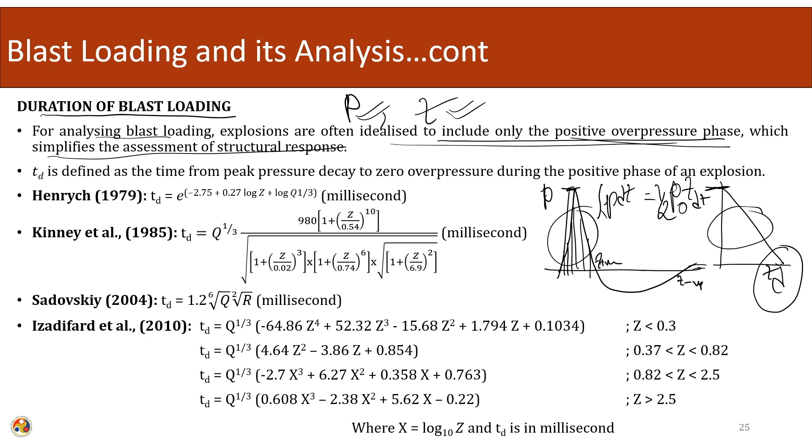For analyzing blast load, explosions are often idealized to include only the positive overpressure, and this simplifies the assessment of the structural response. Here Td is defined as the time from peak pressure decay to zero overpressure during the positive phase of an explosion. This is how we try to calculate the Td. There are different equations, as we have seen earlier, similar to the pressure equations — contemporary equations for calculating Td also.

Henrych proposed this particular equation in '79, and again we can see this equation also has a proximity factor. So this equation is again a function with respect to the proximity factor and other constants multiplied to it.

Kinney, we saw earlier, has a pressure equation, and similarly he has a Td equation, a time equation also. Again this equation is a function of the proximity factor — this is the non-dimensional value of the proximity factor, and multiplied by a value, it converts back into the time Td.

Sadovskiy also proposed a similar equation, and Izadifard also proposed different equations. Here he broke it into four parts depending upon the range of the proximity values — he proposed four equations. So the point to take away is that there are different equations, and all these equations have their own limitations.

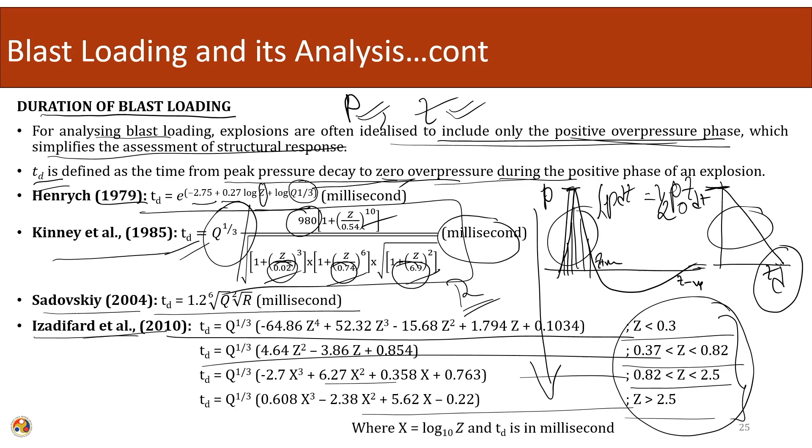Either they are grouped depending upon the proximity values, or they are grouped depending upon the type of explosive used, atmospheric conditions and other factors. Also they are unit dependent. So all the factors being used are made depending upon the units, and all these equations are somehow related with the proximity factor. These are good approximations that can be used to estimate the time of loading, but they should be used carefully, taking into account their limitations as well as the particular unit they are given in. So this way we can use different equations to categorize our blast loading, the pressure and the time part also. Now, the effect of the blast loading.

During an explosion, a pressure bulb forms and a spherical pressure wave expands outwards. This is how the blast is going to expand outwards. So when these waves strike the ground, they reflect and reinforce the incident wave. If there is a reflection, a reinforcing effect will form, and that will add to the incident wave, and then travel along the surface with greater pressure, velocity and duration.

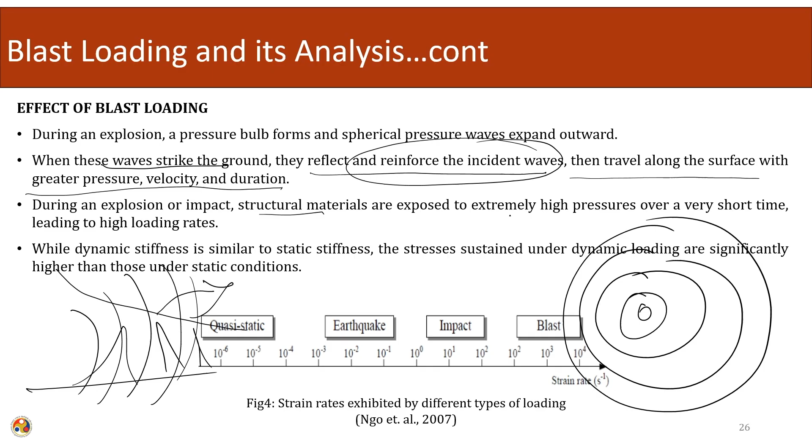So there will be an increase in the effect of the blast if there is a reflection from the ground. During an explosion or impact, structural materials are exposed to extremely high pressure over a very short time. During an impact, this is the nature of the loading, and during a blast, this is the nature of the loading, where the magnitude of the pressure or force is very high, and the time duration is very small. So the structure is exposed to extremely high pressures in both events, occurring over a very short period of time, resulting in a high loading rate.

While dynamic stiffness is similar to static stiffness, the stresses sustained under dynamic loading are significantly higher than those under static conditions. This phenomena we have seen as a strain rate effect.

As the rate of loading increases, the amount of stress that the system can survive becomes more, so its resistance capacity becomes more. What might happen is that the value of strain or ductility might become less, but stress wise it will increase. Strain wise, or ductility wise, it might decrease. So this is the enhancement in strength due to the strain rate effect.

As we move from quasi static to normal loadings like earthquake, then to the impact region, and again to a high strain region like blast, the stiffness of the system and the strength of the system increases significantly.

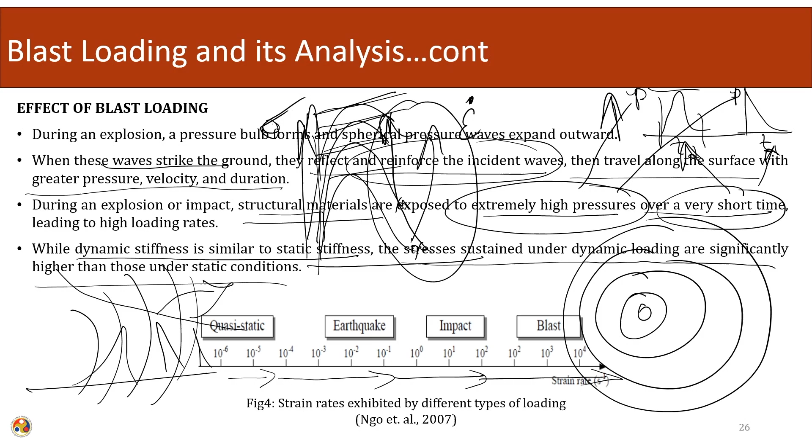So in blast resistant design of structures, the increased material strength under higher loading rate is accounted for by using the dynamic increase factor. If we look into the stress capacity in the dynamic sense and stress capacity in the static sense, there will be an increase in this value, and this is known as the dynamic increase factor. So for a high strain rate event like a blast event, we use the enhancement in this capacity.

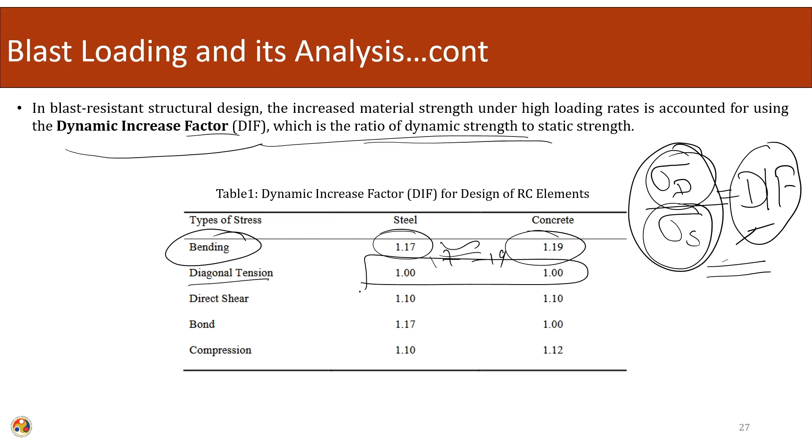DIF is nothing but the ratio of the dynamic strength with respect to the static strength. So in the bending phenomena, if we look into steel and concrete, it is roughly increasing from 17 to 19%. For diagonal tension, we do not account for any increase, though in reality it might increase, but since this phenomena is very complex, we do not take any increase in the factors.

Shear, again a phenomena less understood, so we only take 10% increase. Bond, again for concrete, it is not very well known, so we do not take any advantage due to the dynamic increase factor, and we keep this ratio the same. Steel a bit more is understood, so we take around 17% increase. Compression, we take 10 to 12% increase. So basically if you look into this phenomena, what is interesting is that in reality there will be a dynamic increase factor in the blast event, due to the high increase in strain rate, but there is a parity between what we know and what we do not know. So what we know, we try to take full advantage of.

So here bending is normally well known, so we take 17 to 19% increase in both steel and concrete. The phenomena which are not very well understood, like diagonal tension, direct shear, we do not try to take that advantage, like the bond slip in the concrete. This is again a phenomena which is not properly understood, so we do not try to take the advantage due to the dynamic increase factor.

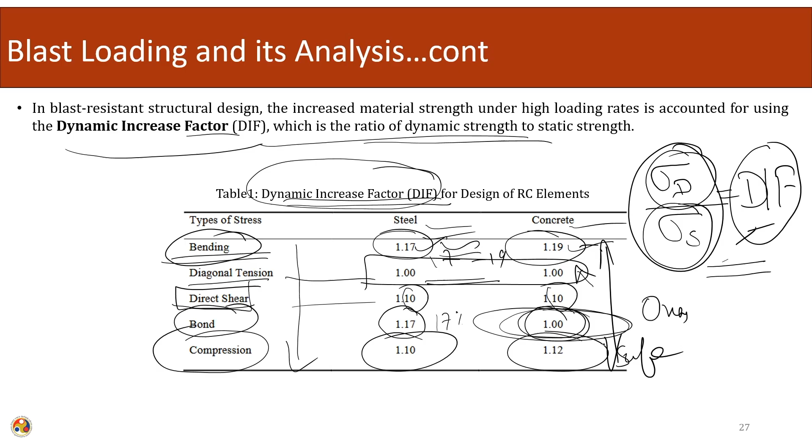So again this is a limitation between the overestimated design. We should have a safe design. Though in reality there might be an increase in the DIF value, but normally we ignore these values. So this will give us a design on a higher side only. Why higher side? Because these are all the capacity values. Though in reality they might be more, we are taking lesser values. So we are assuming a low capacity of the system, though the actual capacity might be higher. So what we are trying to do is increase our margin of safety out here.

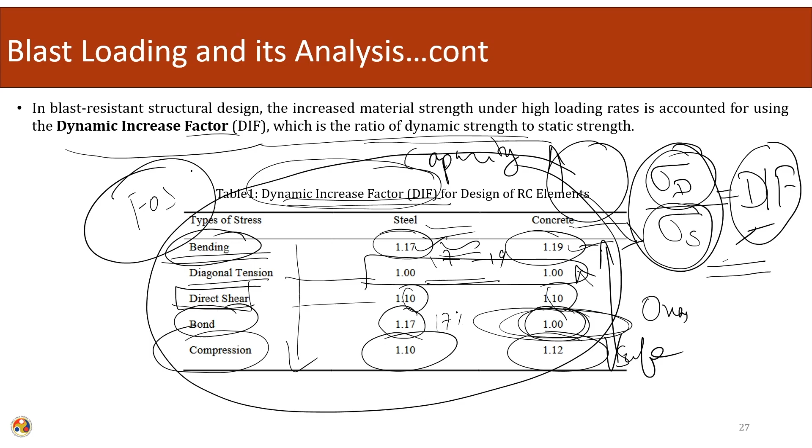Dynamic loading. Static loads are either time independent or change very slowly over time. They are applied gradually and remain on the structure for extended period, for example live loads and slowly moving loads. Dynamic loads are highly time dependent, they act over short duration or change rapidly in magnitude or direction, for example machine vibrations, earthquakes, impacts, blast.

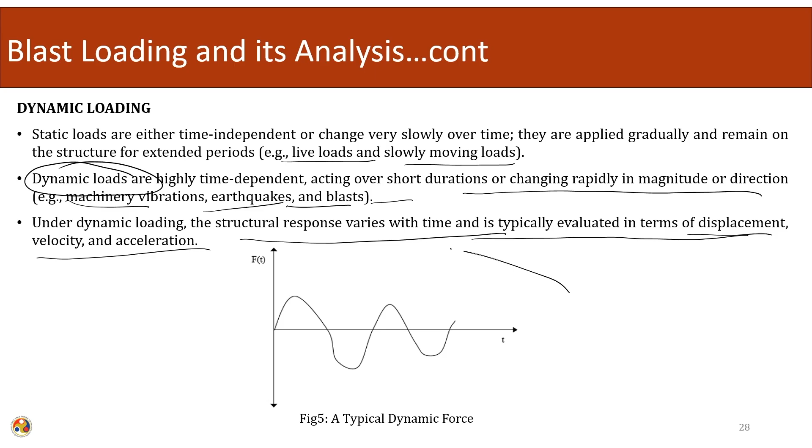So they are predominantly termed as a dynamic event. Under dynamic loading, the structural response varies with time and is typically evaluated in terms of displacement, velocities and acceleration. This is a typical representation of a dynamic force, so again different methods of analysis are being used.

Blast is a short duration load and is often referred to as an impulsive load. Under the theoretical assumptions, if negative pressure is neglected and only the positive phase is considered, the blast can be approximated as a triangular load. This is what we were discussing earlier also.

The literature shows that a structural response to an explosion depends upon its ductility and the natural vibration period. To analyze the dynamic response, we determine the blast wave characteristics, we calculate the structural natural period, and we compare the blast wave's positive phase duration with the structural natural period.

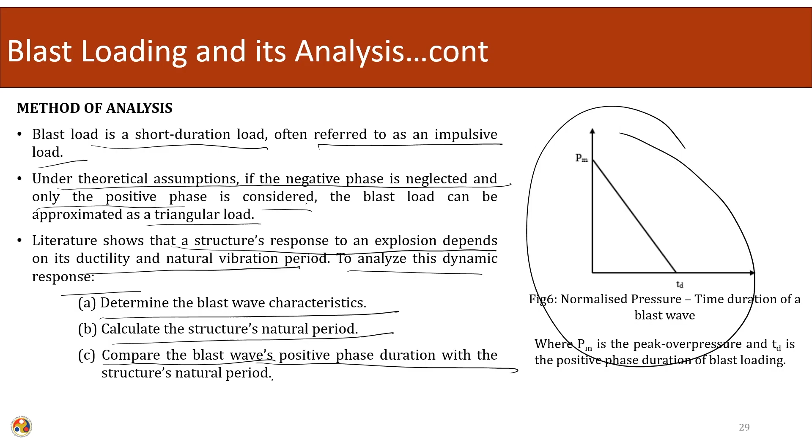So now here we are trying to look into the formulation of the design charts. So now we will take up a case where we will try to design a multi-story building with the structural models.

In the multi-story building, a rigid frame construction is preferred for blast resistant structures due to the open internal spaces, strong lateral load resistance, good energy absorption from the plastic hinge formation. The formation of the dynamic plastic design focuses on industrial buildings like ammunition storage, bunkers, and other types of buildings, single story multi-bay structures like command centers, data centers, and exposure to moderate blast overpressures. So if you are looking into the multi-bay structures, we normally take into account the moderate blast overpressure.

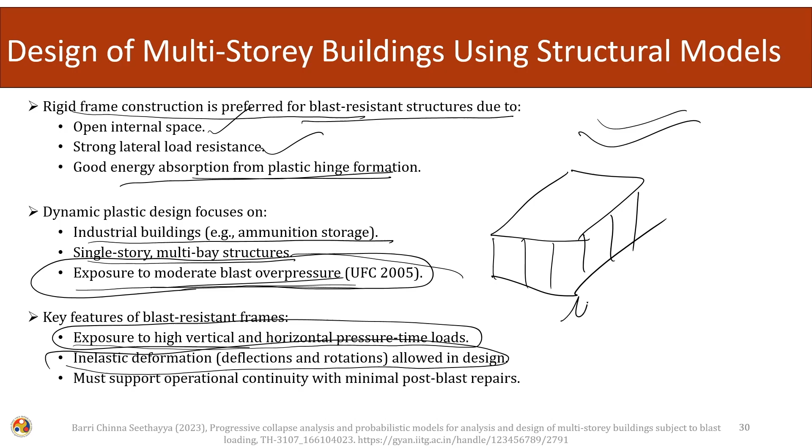So the key features of blast resistant frames are: they have an exposure to high vertical and horizontal pressure time loads, and these pressure time loads are significantly higher. There will be inelastic deformation allowed in the design, so mu might be around 5 and theta might be around 2 to 3 degrees. Here the plastic design is allowed.

And the blast resistant frame must support operational continuity with minimum post blast repairs. They should be operational after any significant event, and the post blast repairs, the repair occurring in the system after a blast event should be minimal. So these are the design guidelines that are translated into design parameters.

So if operational continuity is not required, then we can go for a high ductility value, and we can also increase the value of the permitted rotation. And if minimal repair is required, then we have to tighten the value of the ductility and the rotation. So from here to here it becomes less and less operational. So if you want more operational capability, we have to tighten the value of the ductility, and we will have to tighten the value of the allowed rotation in the particular system.

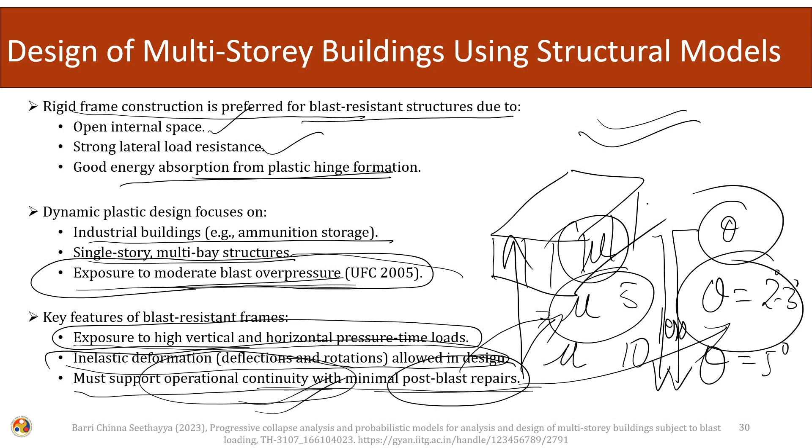Okay, so we have looked into the different methods of the design. Now we are dealing with the specific case of a multi-story building. We can design the multi-story building using an equivalent single degree of freedom system also.

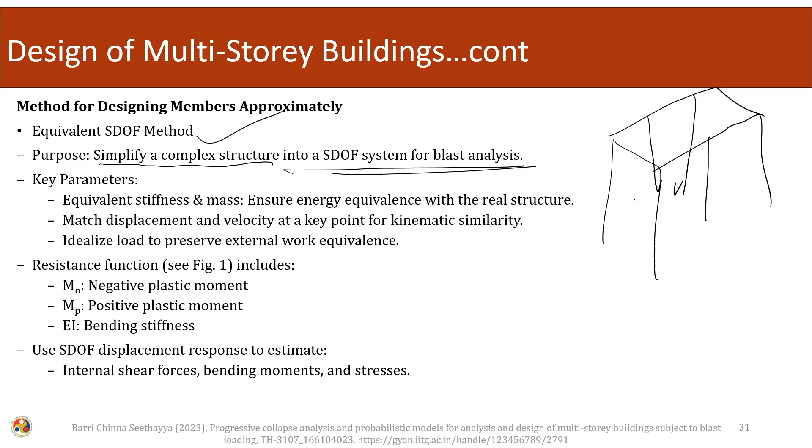So what does it do? In the single degree of freedom method, it simplifies a complex structure into a single degree of freedom system for the blast analysis. If we look into a multi-story building with multiple bays and multiple stories, this is a complex system, and it has a multi degree of freedom system.

So what we can do is, instead of doing this entire multiple degree of freedom system analysis, which is complex and time consuming, we can also employ a single degree of freedom system analysis method and analyze our multi-story building. It simplifies the complex structure into a single degree of freedom system for the blast analysis.

So what are the key parameters required? It requires an equivalent stiffness and mass. We will have to model this entire multiple degree of freedom system into an equivalent stiffness and mass. What we need to ensure is that the energy equivalence is with the real structure. The total amount of energy absorbed by this complex structure should be equivalent to whatever single degree of freedom system approximation we are making. So the total energy should be the same, and there has to be an energy equivalence with the real structure.

What does it mean actually? If we take a very simple example, let us say we are taking a simple fixed beam. We keep on adding load to this system. What is naturally going to occur? There might be a formation of two plastic hinges at the end, depending upon the structural configuration. So this is how the structure will now become.

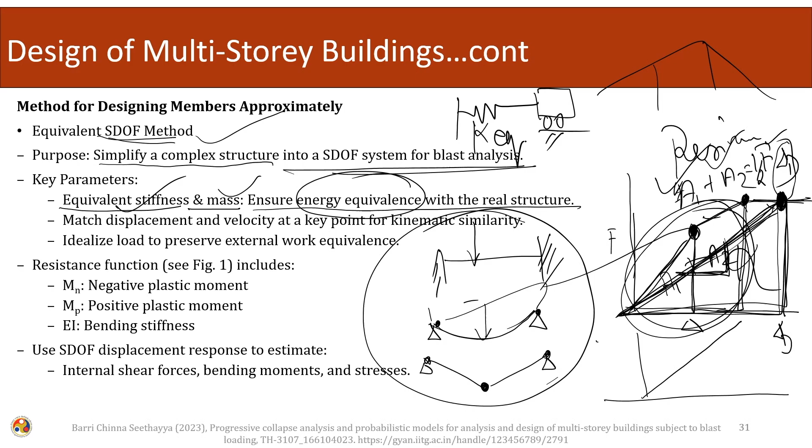So if area A1 plus A2 equals half of F, which was the same as before, times delta D, I know area A1, I know area A2, F I know, so I can calculate my delta D. I can construct this curve, and from this curve I can calculate the value of the equivalent stiffness K. Similarly, I can calculate the equivalent mass. So this complex system has been represented using a simple energy equivalent system.

So here I also need to match the displacement and velocity at key points for kinematic similarity, and we need to idealize the load to preserve external work equivalence. In this way I can change any multi degree of freedom system to a single degree of freedom system, maintaining the energy equivalency, matching displacement and velocity at key points for kinematic similarity, and idealizing the load to preserve external work equivalence.

Similarly, if we take any frame, what we can do is apply load, again draw the force deformation curve, and depending upon the different plastic hinge formation, we can calculate the total external work equivalence, and then change this system into an equivalent system, keeping the velocity and kinematic similarity. So this way any multiple degree of freedom system can be changed into an equivalent single degree of freedom system. This is very useful when designing multi-story buildings.

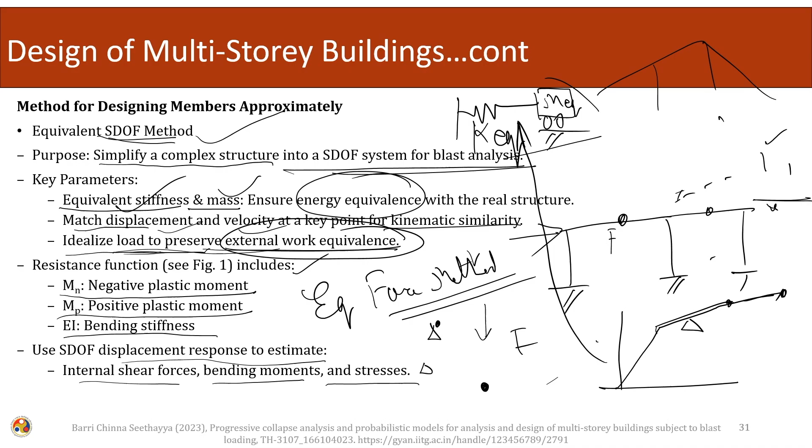The resistance function will include Mn, the negative plastic moment, the positive plastic moment, and the bending stiffness. Using this single degree of freedom approximation, the displacement response can be calculated, and from the displacement responses the internal shear force, bending moment, and other stresses can be calculated using the equivalent force method we have already discussed. So using this methodology, a complex multi-story building with a multiple degree of freedom system can be broken down into a single degree of freedom system, analyzed and designed very easily.

Okay, so here this shows what we have discussed earlier. We have taken a fixed beam, and this is how the beam is going to deflect. Let us assume that a...

A plastic hinge forms at the end. When the plastic hinge forms at the end, after the formation of the plastic hinge at the end, this becomes like a simply supported beam. After that, keep on increasing the load, there will be a plastic hinge formation at the middle, after which it can no longer support the load.

So, this is the original force deformation curve. From here to here it is behaving as a fixed beam, and from here to here it is behaving as a simply supported beam.

So now the entire thing, what we can do is represent the total area anywhere, and we have to equate this area A1, A2 with the new area.

So this area, this will be area A1, this will be area A2, and this is our new equivalent area. This area needs to be equated. This part is the same, so it can be cancelled out. And here we can calculate the equivalent spring stiffness.

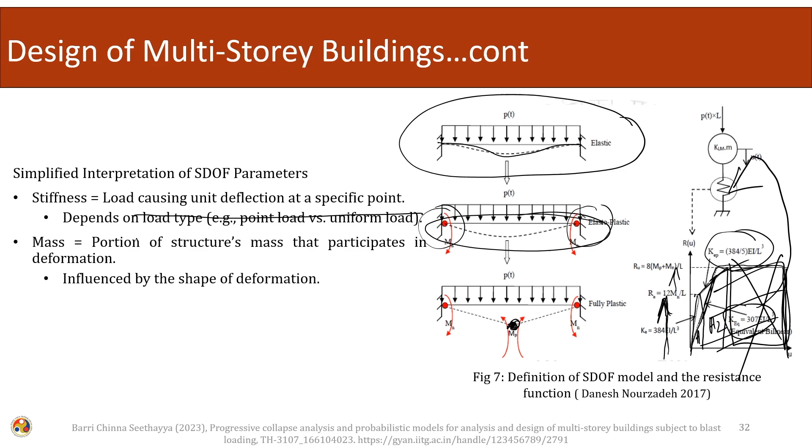So what is stiffness? Stiffness is the load causing unit deflection at a specific point, and mass is the portion of structural mass that participates in the deformation. Both these parameters can be calculated using the shape function. So a complex system is represented as a single degree of freedom system.

So the same analogy you can use for the multi-story building system design also.

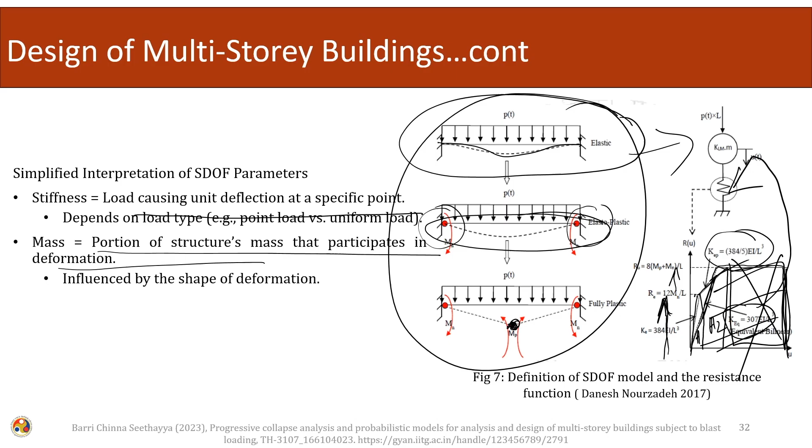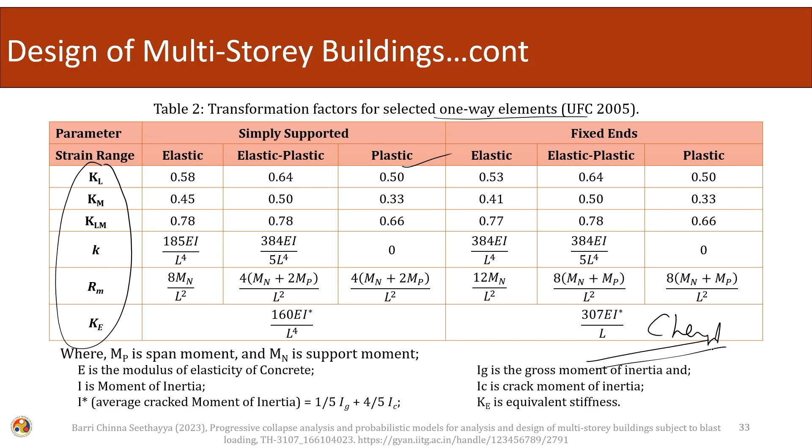So here we are showing the transformation factors for the selected one-way elements. Depending upon the different strain range, elastic, elastoplastic, plastic, different mass and stiffness factors are being used. This chart can be used for design purposes. So these are for the one-way elements.

So similarly, what we can do is take the Newmark's analytical deformation equation, and we can apply it to the RCC columns at the ultimate performance level.

So here this is the Newmark's equation, and these are the different parameters for the Newmark equation. XE is the equivalent elastic-plastic deformation, and this is simply calculated using the resistance divided by the stiffness. So this way we can calculate the response of the system.

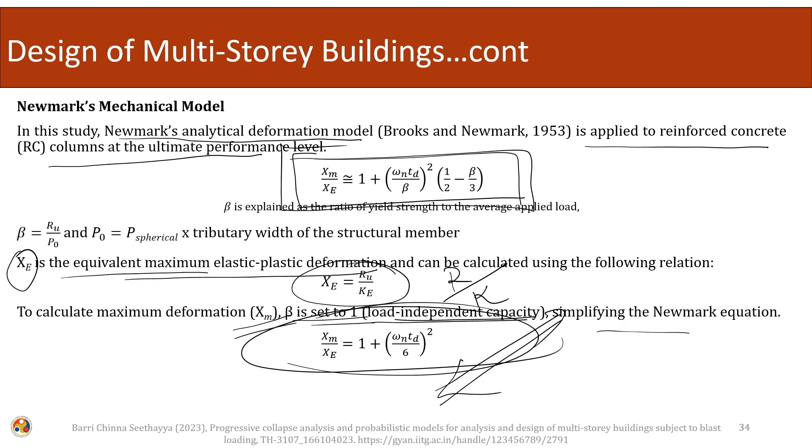So in order to calculate the maximum deformation Xm, normally beta is selected as 1, the load independent capacity, and we can simplify the Newmark's equation and calculate the response of the system. This is again a very powerful equation, simplistic in nature, and it can be readily used to calculate the response of any system.

So we can use this approach to design the system, using the member design approach with the peak loads. What we can do is make an equivalent single degree of freedom model to design the structural members for blast resistance through the following approach.

We can determine the peak load, such as axial, shear and bending moments. So peak load equals the critical load factor times the applied load or the limiting resistance. Then we can calculate the member resistance for each member, using the strength increase factor and the dynamic increase factor.

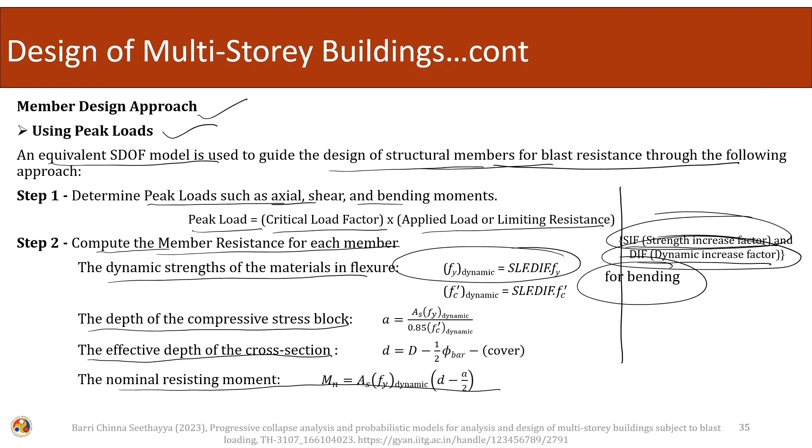So the dynamic strength for the material in flexure is thus multiplied by the strength increase factor and the dynamic increase factor, for bending. After that we can calculate the depth of the compressive stress block, the effective depth of the section, and calculate the nominal resisting moment. So this is a step by step approach for the design of an RCC member.

So, the resistance of a simply supported and fixed unit width cross section is given by this equation. Shear strength, again multiplying with the particular factors, we can calculate the dynamic shear strength and the nominal shear strength.

After that we define the equivalent single degree of freedom system. The equivalent stiffness of the trial section we can calculate using this equation, and the trial section's gross moment of inertia, or second moment of area, is given by this equation. The cracked moment of area we can also calculate.

So here what we are trying to do is take the gross second moment of area and calculate the cracked second moment of area. Our section will lie somewhere between the gross and cracked values, so we take the average moment of area between these two.

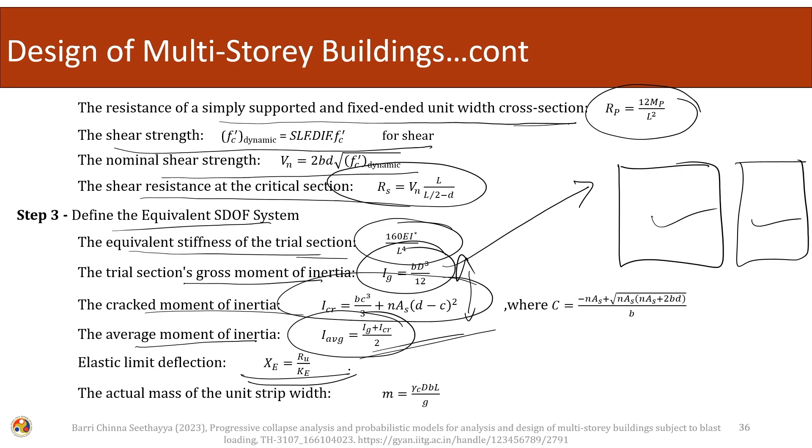So we have the elastic limit deflection, which is nothing but the resistance divided by the stiffness. The actual mass we calculated, and from here we can calculate the effective mass, the equivalent mass, using the charts.

Using the charts that we previously provided, we can calculate the equivalent mass, and then we calculate the equivalent single degree of freedom system, including its time period. After that we apply the loads and solve the equivalent single degree of freedom system.

The structural members are designed using load combinations of blast and conventional loads, so we apply the conventional loads plus factored blast loads. The peak deflection of the equivalent system is based on the maximum support rotation and the ductility ratio, which we discussed earlier.

The dynamic support reactions are calculated and applied to the supporting elements as loads. The natural period of the single degree of freedom system is compared to the blast positive phase duration, and depending on this ratio, the system will behave in the impulsive regime, the dynamic regime, or the pressure regime.

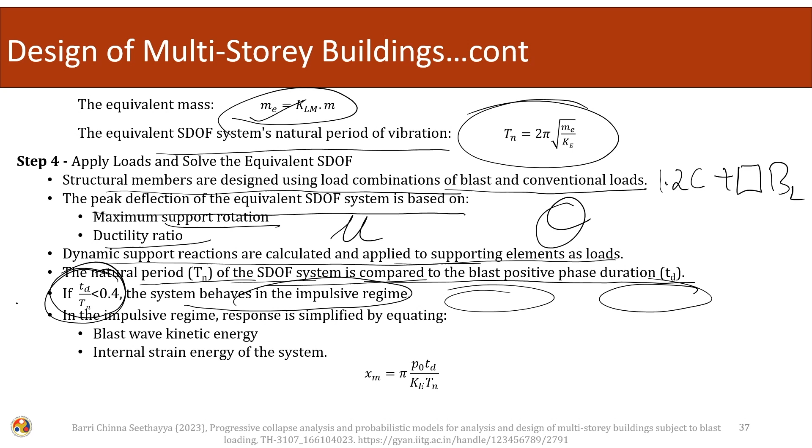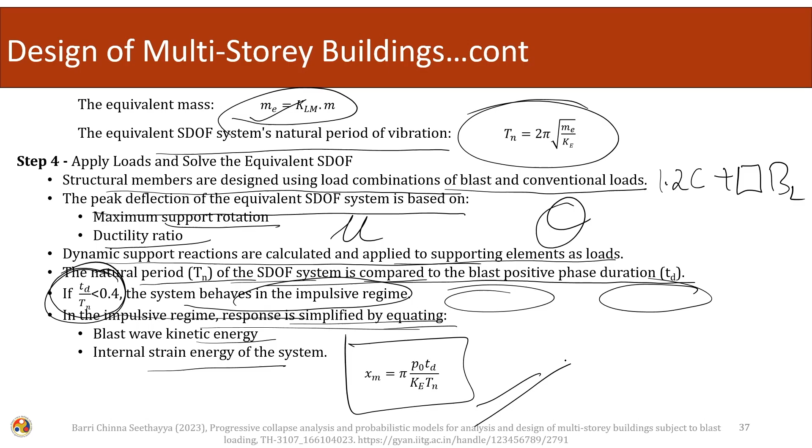In the impulsive regime, the response is simplified by equating blast wave kinetic energy to the internal strain energy of the system. This is an approximate method to calculate the response of the system.

After that we check the limits of the responses. The response limits are evaluated against the maximum support rotation and the ductility ratio. If they are less than the allowed limit, it is okay; if not, we have to reiterate and redesign the system. This is an effective and easy method to design the system.

A complex multi-degree of freedom system can be designed using this approach, but it has limitations. Member by member single degree of freedom system analysis is common and reliable for blast resistant design. So though the system is formed of multiple degrees of freedom, here we are breaking it down and doing a member by member analysis.

This method may miss some complexities of the full structural dynamic response. We take a full complex system and break it down into member by member design. This has to be done for different member configurations, and there might be interactions between these members which could be missed during this analysis.

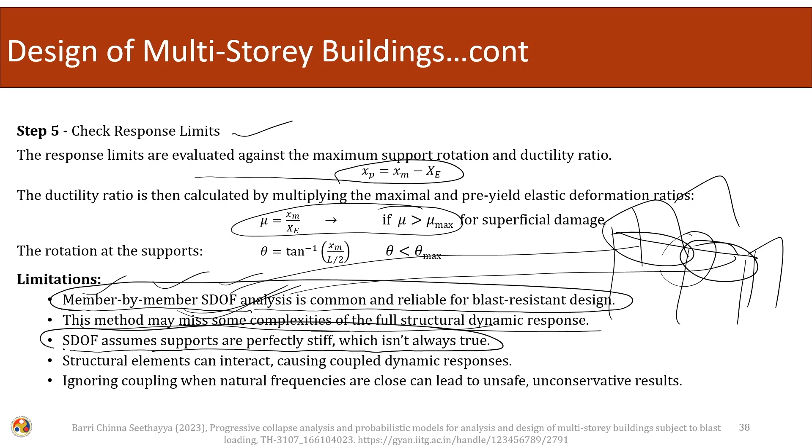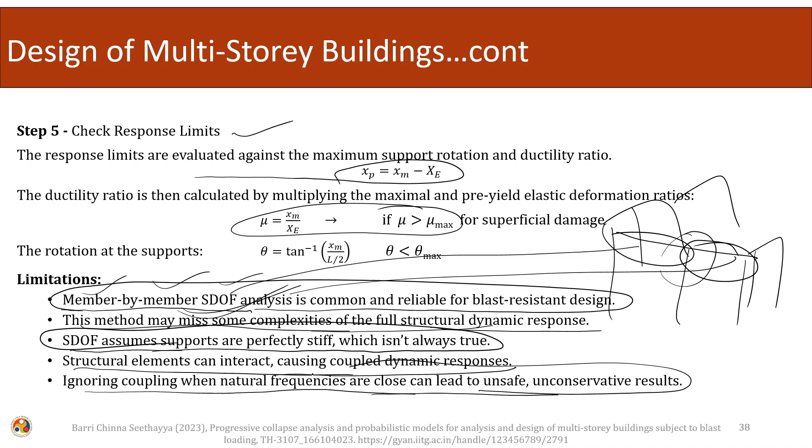The single degree of freedom system assumes supports are perfectly stiff, which is not always true, and structural elements can interact, causing coupled dynamic responses. Ignoring coupling when natural frequencies are close can lead to unsafe, unconservative results. These are the limitations when designing a complex multiple degree system using the single degree of freedom approximation.

The good thing about this approximation is that it is fast, reliable, and can design a very complex system with minimal ease. The limitation is that some complex interactions and behaviors, especially when modes are closely spaced or there is interaction between elements at the joint level, might be ignored. So we always have to design these things taking precautions.

If we have the resources and time permits, we can do a complex analysis; if time is limited, we can rely on these easy, fast and reliable methods of analysis. I will request you to look into these methods and practice them. We will continue next time. Thank you.